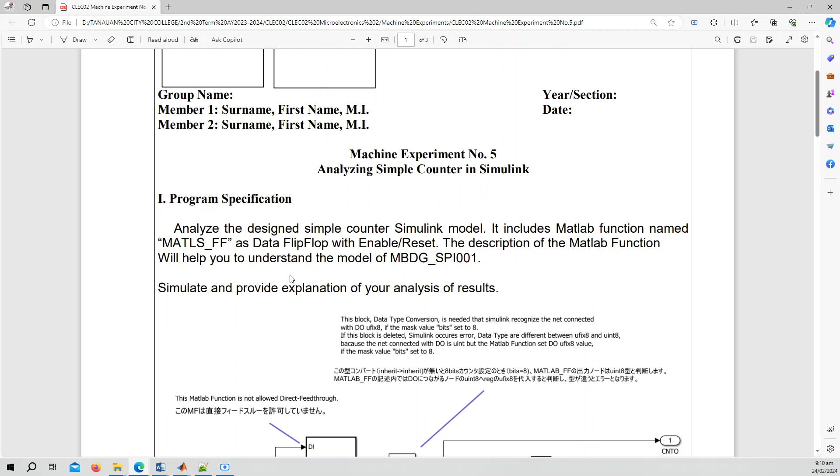So this is the program specification. It's simple - you don't need to tweak the model or the MATLAB script I gave. All you have to do is analyze, because I want to develop your analytical thinking.

Because when you go to work eventually after you graduate, you won't always have to model or code from scratch. There are available codes and models that you can study and tweak - that's the skill I want to develop in you.

So I'll teach you a method on how to do that, so it's easier for us to understand Simulink and the MATLAB script. It includes a MATLAB function named matls_ff - depending on what you want to name it - as data flip-flop with enable reset.

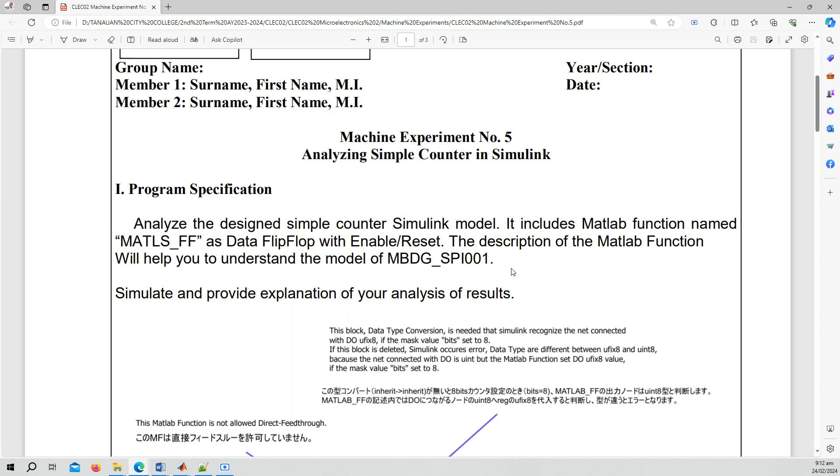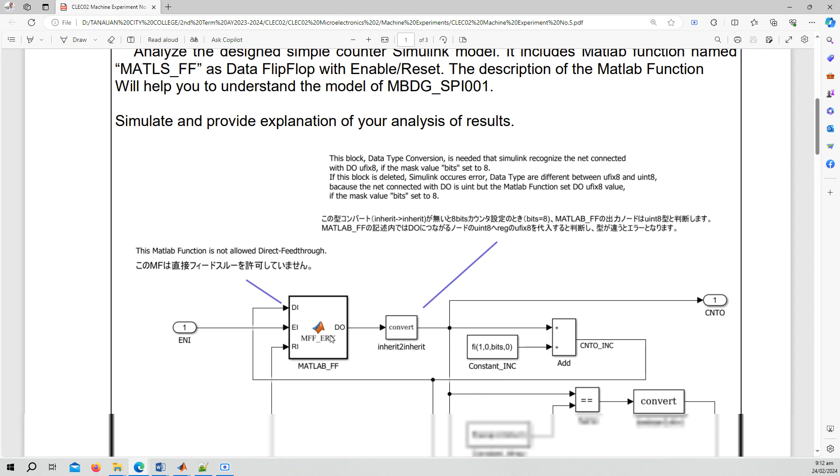All you have to do is simulate and provide an explanation of your analysis of results. So of course, you run it, then this is our sample model - we can see our sample model here, guys.

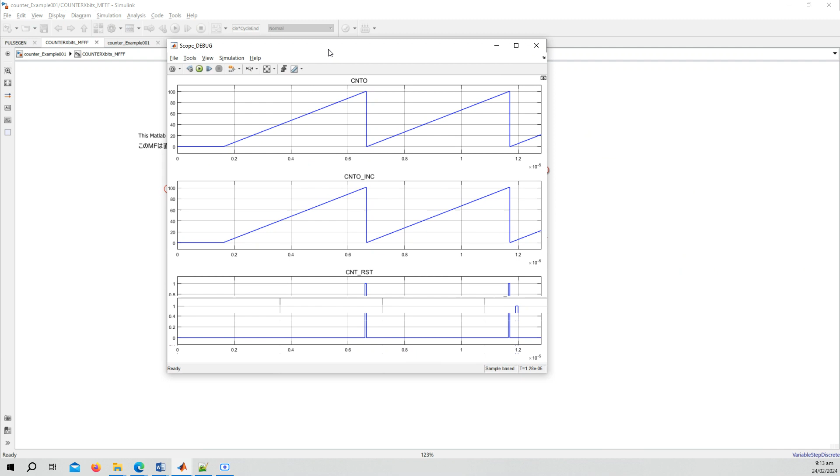This is another one for count o, count o, INC (increment), and then count reset.

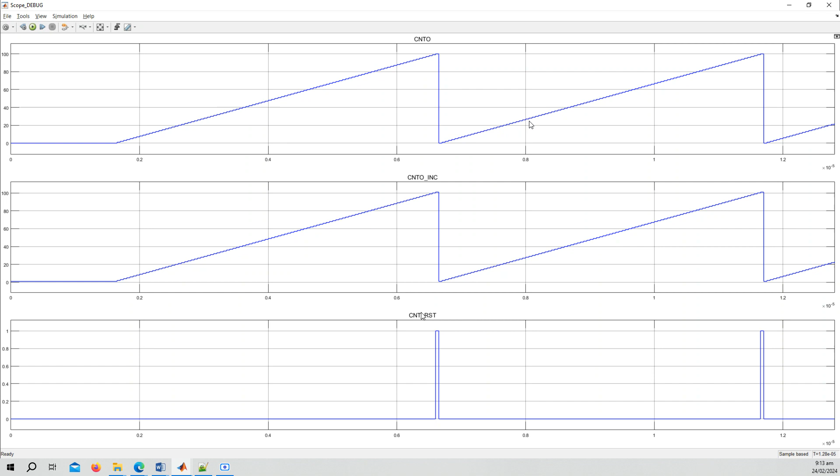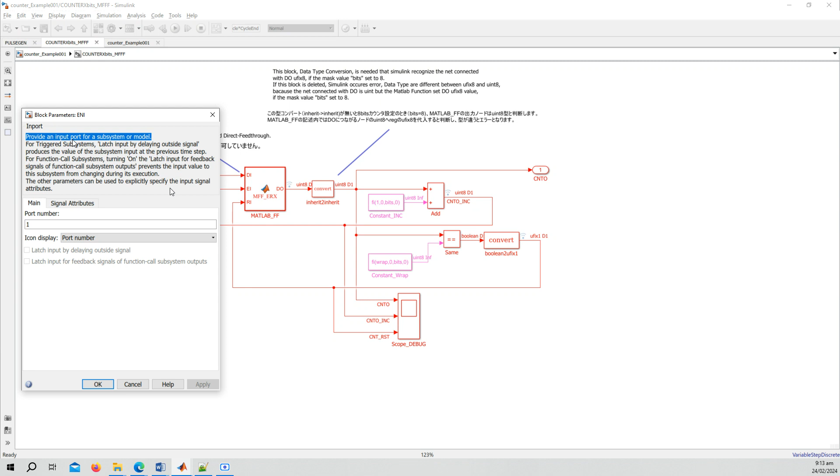And then this one - this is data type conversion. What does data type conversion do? And this one, just double click it - it's a sum. And this one, a constant is also used here.

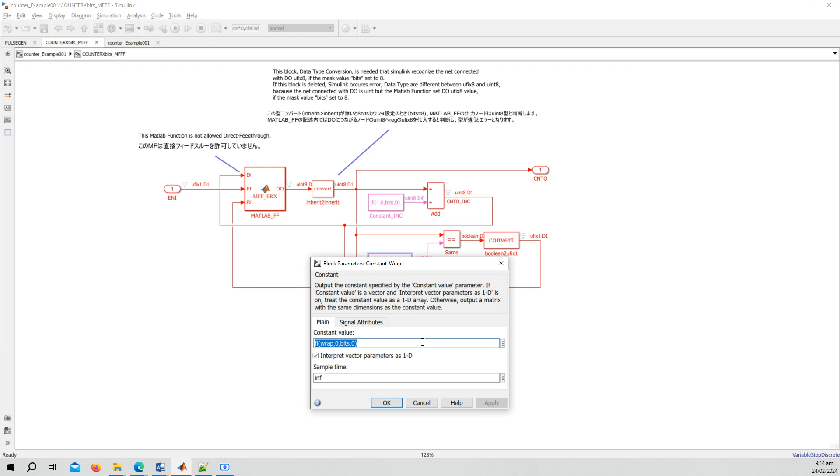Then in the constant, there's a little syntax placed here. So what does this FI wrap 0 bits 0 mean? Those are the things that you need to know. And then this is our scope debug output.

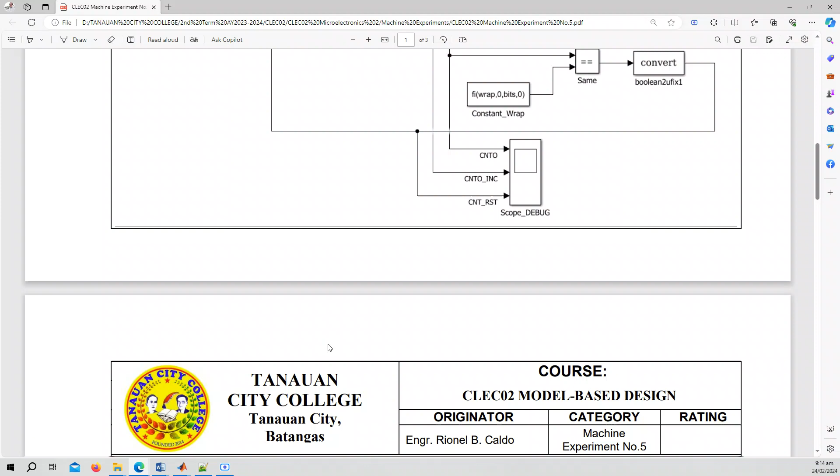So, what is this data type conversion for? This is a counter, but it's important to understand the sequence of this code, this model. This is the model I showed you earlier that you needed to understand. And then, this is the MATLAB function, and then data and results and conclusion.

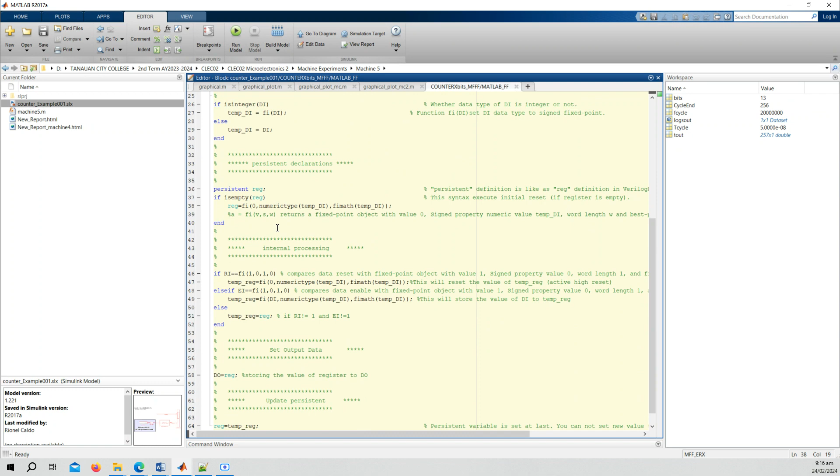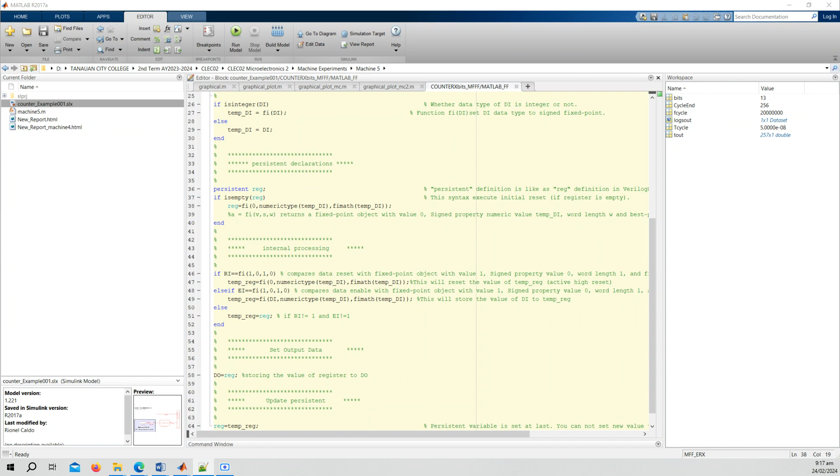And then we saw persistent declarations. This code declares a persistent variable reg, which means its value persists across multiple function calls. If reg is empty, indicating that it hasn't been initialized yet, it initializes it with a fixed point object having a value of 0, a numeric type derived from temp underscore DI, and fixed point math properties derived from temp underscore DI. So that's what the persistent does.

And then we also have here the internal processing. For another nested if-else statement that we saw, this block of code checks conditions based on the values of Ri and Ei using fixed point objects. If Ri is equal to a specific fixed point object, it sets temp underscore reg to a new fixed point object with a value of 0. If Ei is equal to the same fixed point object, it sets temp underscore reg to a new fixed point object with a value of DI. Otherwise, it sets temp underscore reg to the current value of the persistent variable reg.

And then we saw setting the output data. The line DO equals reg sets the output variable DO to the current value of the persistent variable reg. And finally, we saw reg is equal to temp underscore reg. This line simply updates the persistent variable reg with the value of temp underscore reg. The purpose is to ensure that the value of reg is updated for the next function call, reflecting any changes made during the current call.

So in summary, this MATLAB function appears to implement a flip-flop with enable and reset functionality using fixed point arithmetic. The function uses persistent variables to maintain state across multiple calls and handles different cases based on the values of the input signals Ri and Ei. Alright, so that's all our MATLAB script does.

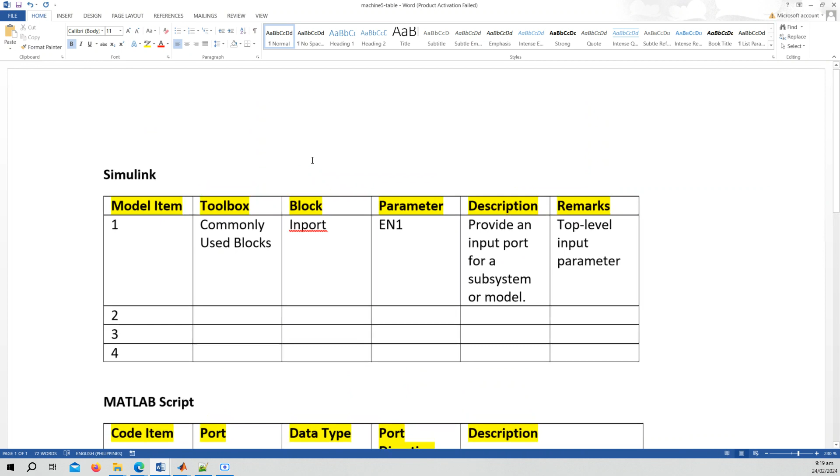Another thing that you have to do, gawa ka ng table to represent. Ito, binigay ko na yung example, gagayahin mo na lang. Kasi aside from the skill of modeling, kailangan you know how to make specifications. Kapag nag-work ka sa industry namin, meron gumagawa ng specifications, meron gumagawa ng design, meron nagve-verify, meron nagsisynthesis. There are different groups of people doing different things. At lahat yon tinatry kong ituro sa atin. So kailangan marunong tayo mag-analyze ng code, at the same time, you know how to represent.

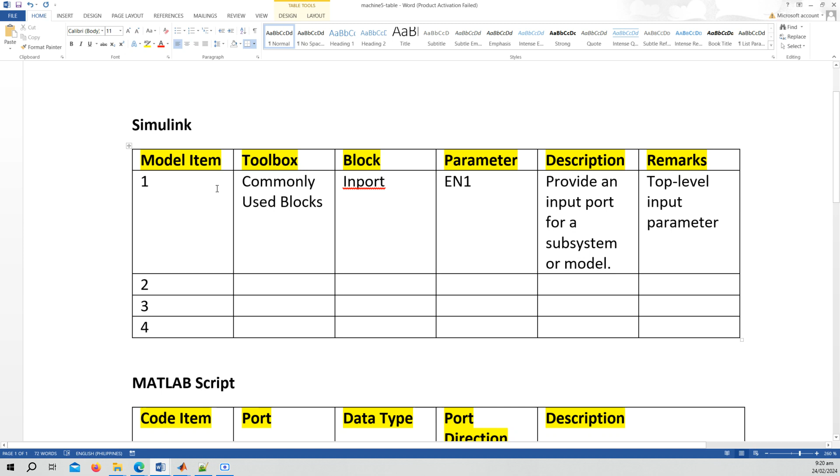Yung una, this is for the Simulink. Gawa ka ng table. We have columns: model item, toolbox, block, parameter, description, and then remarks. So as you can see here, meron ako dito na model item 1 as example.

Ang pinili ko dito, yung Inport, ang parameter niya, en1. Ito yung tinutukoy ko dyan. Ang pangalan niya en1, di ba? Obviously, ito yung pangalan ng variable or the parameter or the port. Pwede nyo nang ilagay dito port, parameter, or variable. Pangalan niya, en1. And then, anong block ba to?

Anong block? Di ba pag dinouble click mo yun, obviously, ay Inport. And then, anong ginagawa ng Inport? Provide an input port for a subsystem or model. So yun yung ilalagay mo dito sa description.

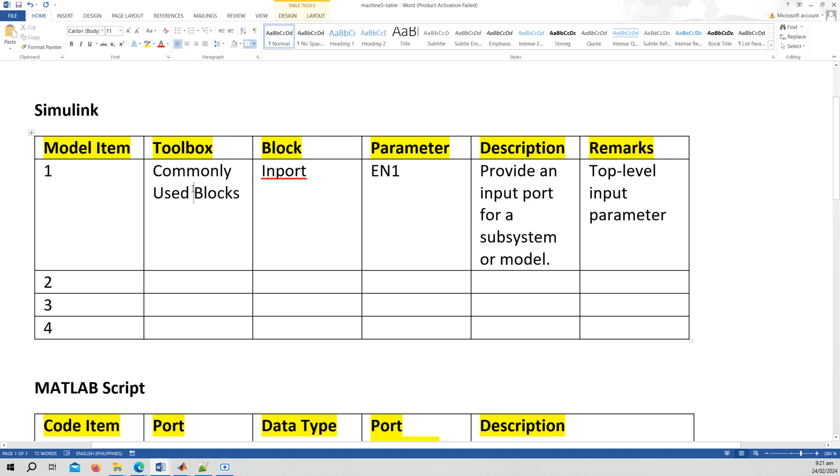Saan ba kinuha itong Inport na to? Punta ka ng library browser. Makikita mo sa commonly used blocks. Pag dinouble click mo to, andun pala si Inport. So under siya, yung toolbox niya dapat ay commonly used blocks.

Ngayon, yung remarks, ikaw na yung maglalagay niyan. Pag tiningnan mo siya dito, nasaan ba si EN1? Nasa top level block siya, di ba? Wala naman tayong subsystem dito, di ba? Wala naman siya sa loob ng MATLAB function. Wala naman siya sa loob ng data type conversion. Nasa labas po siya. Kaya ako nilagyan siya ng remark dito na top level input parameter. At you also have to do that to the rest of the parameters available in this Simulink model.

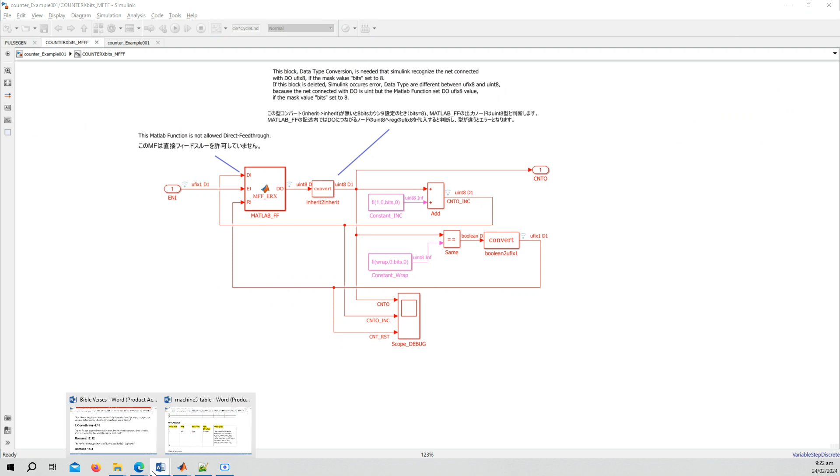Another table that you have to do is for the MATLAB script. Isa lang naman yung MATLAB script. Ito lang yun, pinaliwanag ko pa kanina kung anong ginagawa ng MATLAB script. Definitely, for the MATLAB script, kailangan mong ilagay yung code item. Dito kasi model item ang bilang, dito code item.

And then the port, so we have port. Obviously, dito may port na DO. Ito yung tinaray ko, DO. At saka, anong data type ni DO? Reg siya. Saan ko nakita yung reg? Doon sa code, tingnan mo yung code. Anong direction niya? Input ba siya? Output ba siya? In-out ba siya? Obviously, output. And then, anong ginagawa ba ng DO na port?

Siyempre, kailangan mong intindihan, i-analyze. Ang description dyan, the variable DO is the output of the MATLAB function MFF underscore ERX. The value assigned to DO is the current value of the persistent variable reg. So ganun kasimple lang yung pagde-describe for each port. At the minimum, i-describe mo yung port.

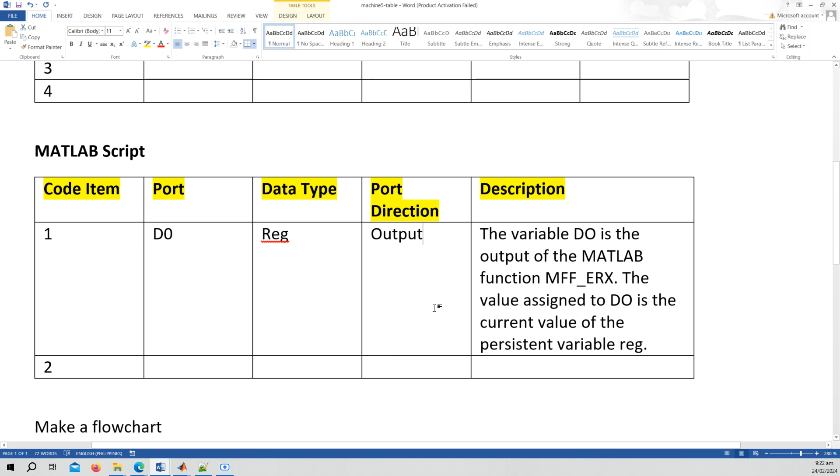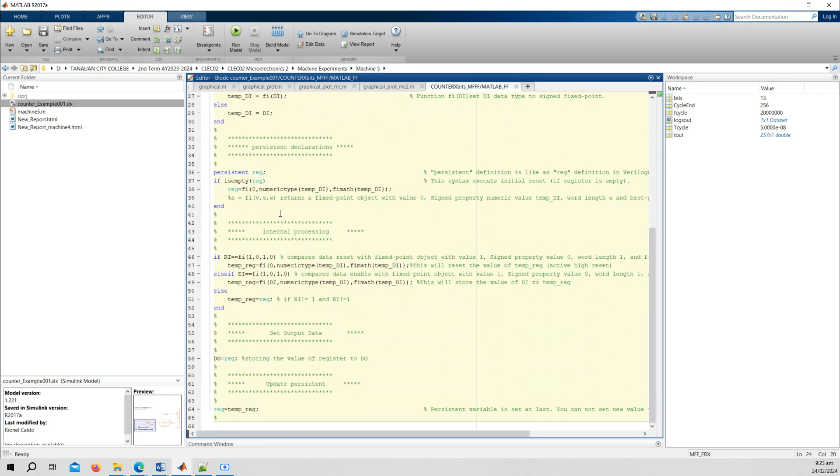E di meron pang DI, EI, RI. Pagpasok mo nito, meron pa bang internal signal na ginamit dito? Kung meron internal signal, may syntax na ginamit, i-explain mo rin siya.

Alright, and then after nun, make a flowchart. Yung paggawa mo ng flowchart, I would suggest buuin mo na from start, from input, na papasok sa MATLAB function, ipaprocess ni MATLAB function, anong gagawin ng MATLAB function, sinabi ko na kanina, pinaliwanag ko na, gawan mo yun ng flow. Then yung output niyang DO, anong gagawin niya, i-convert, after niya ma-convert, pupunta sa addition, and then meron pa siyang another input na kailangan, then yung output niya pupunta dito, yun pala yung CNTO underscore INC na variable. And so on and so forth.

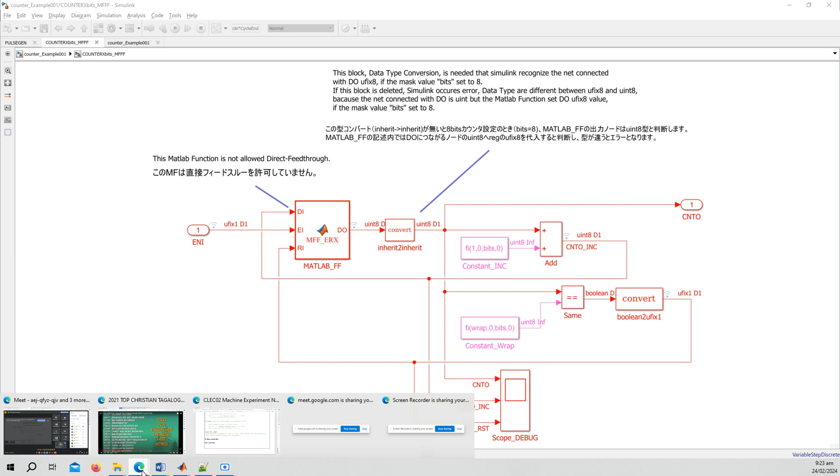So, gawan po natin ng flowchart. Alright, so I guess yun lang yung kailangan natin gawin for experiment number 5.